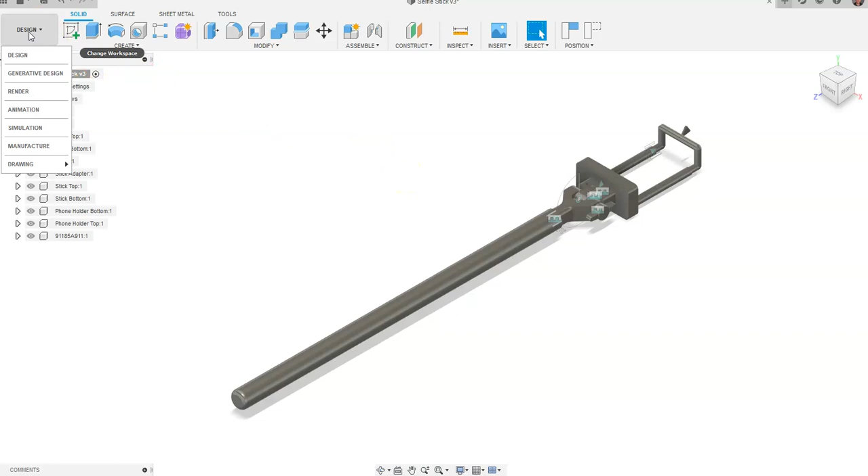You're going to notice a brand new set of tools loads for you, and we can do several different things when we transform. We can say everything just comes out one level, or we explode to multiple levels.

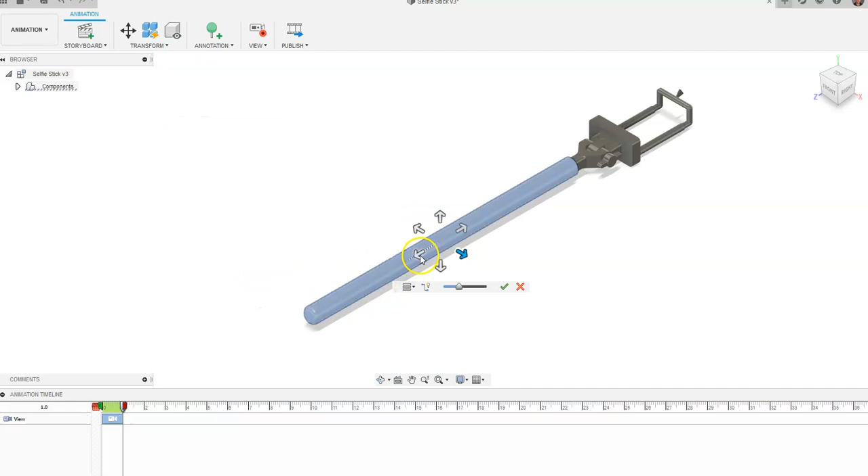But we have a lot going on with this selfie stick, so we're actually just going to do a manual explode. We're going to click on this object, change the direction of this handle coming off the selfie stick, and we can change its direction by going on the explosion scale.

As this object comes off, we can drag out and get an idea of the scaling we want. We can toggle on and off these trail lines that it's following. I'm going to leave those on for now, hit my check mark, and say okay.

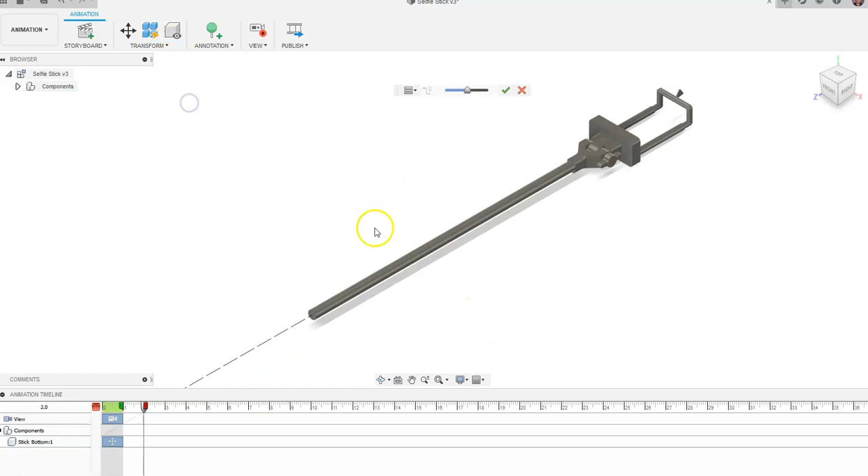I'm going to go back up to transform, manual explode, click on this part. We're going to change the direction and go for our explosion scale again. We want this to come off at a distance that gives us enough room to work with, so I'm going to explode this off about this distance.

We want to make sure we're not going too far away, but we're also giving enough space for us to explode every one of these parts. I'm going to hit our check mark and say okay.

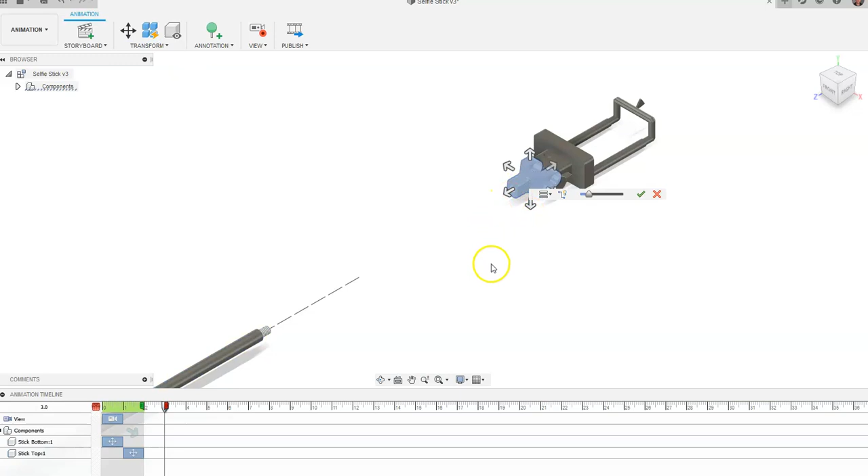We're going to come back up to manual explode, and we're going to explode this item out. But before we do that, we would have to take this part off first, since this just can't come off of this part.

So this is the item I'm going to do a manual explode on. I'm going to click on this side part, make sure we have this direction, and drag our explosion scale out about this distance. Since we're coming off at a different axis, we can keep that a little bit closer.

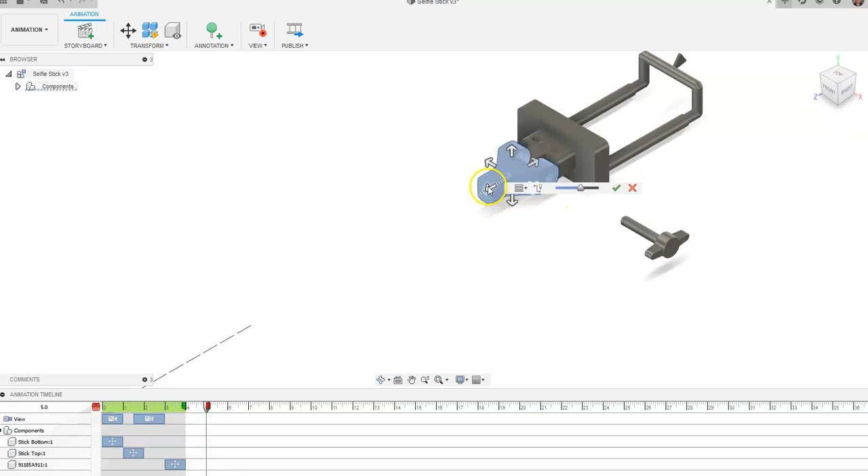Let's go back up to transform, manual explode. We're going to click on our object, drag off at this distance, and set the explosion scale. Let's bring that all the way off and say okay.

Back up to transform, manual explode. We're going to explode this object off in this direction, take it off about here, and say okay. Same thing with this screw here.

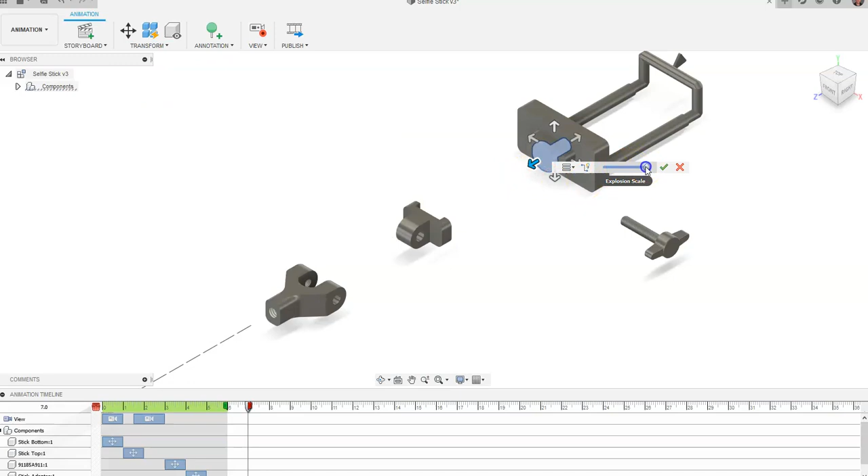We're going to go to manual explode, click on that object, go off this direction, and go to about here. Remember, it's up to you to choose the distances of how far something is exploded off.

But we want to make sure we give ourselves enough room to see everything — that's the biggest issue you're going to have. If we just went with one level, sometimes things can be too bunched together when you have this much going on. We're going to go to manual explode, click on this object, off this direction.

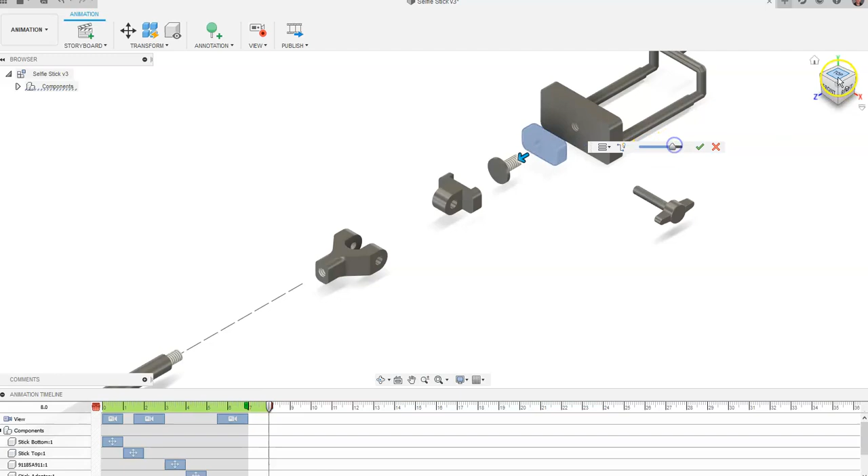We're going to find our scale, bring it about halfway between. We can also come over to this side and decide what about halfway between is. That looks fine to me.

We're going to come back up to our isometric view, and we need to take this handle off back here. We're going to go to transform, manual explode this object, and drag off this direction, coming off just about to here.

We can tell that that fits inside of those holes — those cylinders go inside and fit. We're going to go ahead and say okay.

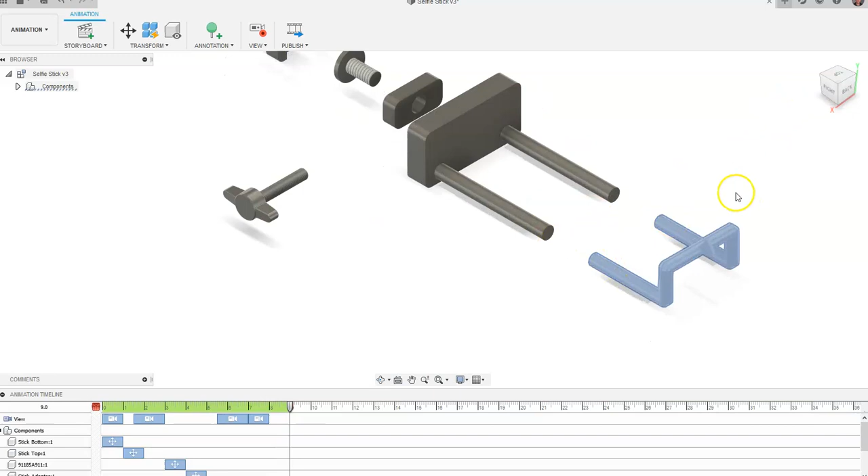So now we have for ourselves an exploded view created. Now we can come down here to the bottom and say let's go all the way back to the beginning and watch this explode. Fusion 360 is going to zoom in with each exploded part as it comes off.

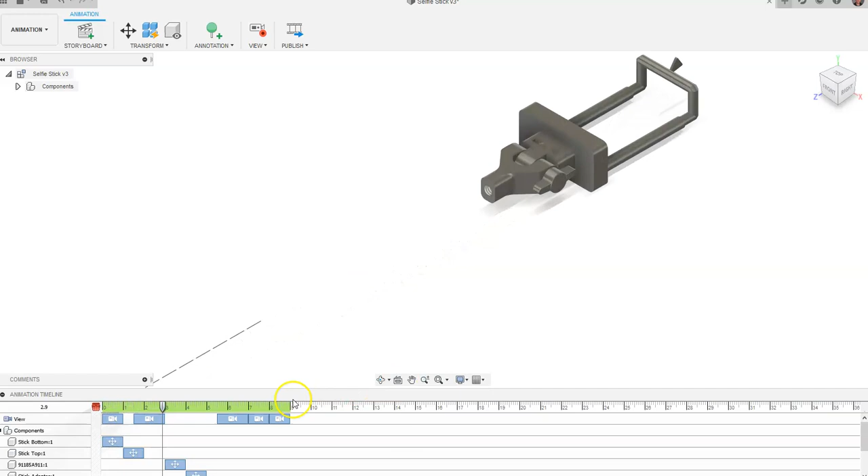It's a pretty cool feature. We can go ahead and play again, watch it come apart. You can notice you kind of have a timeline down here at the bottom, but the most important part is that we're just learning how to create an exploded view.

Notice that even as I went to the side there, it remembered the camera angle that I was at and took that. But in order for us to make an exploded view drawing, we have to learn how to make an exploded view through animation.

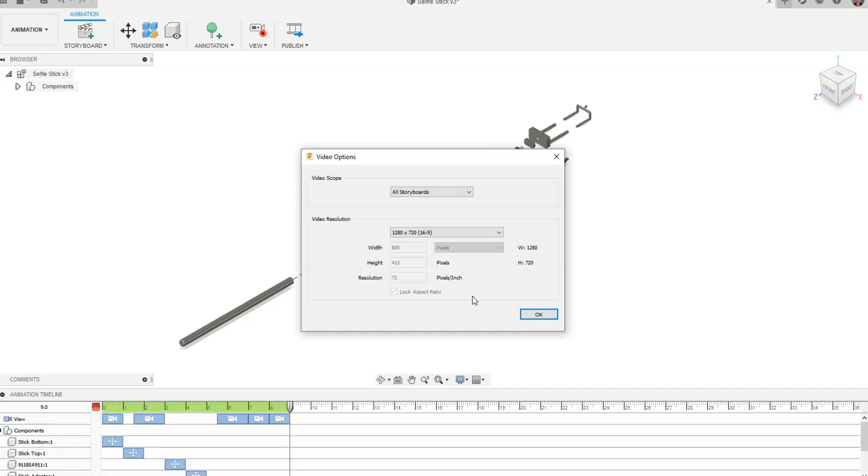Now after you've done this, if you're satisfied with the video, you can go to publish video and say you want to make this a super high pixelation. I can change the size of stuff, go into custom and change all that down here. But if you wanted to, you could just say okay and export a video of this outside of the Fusion 360 program that would show exactly how to put something together and take it apart.

So this has been a video on how to create an animation for an exploded view of your selfie stick in Fusion 360.